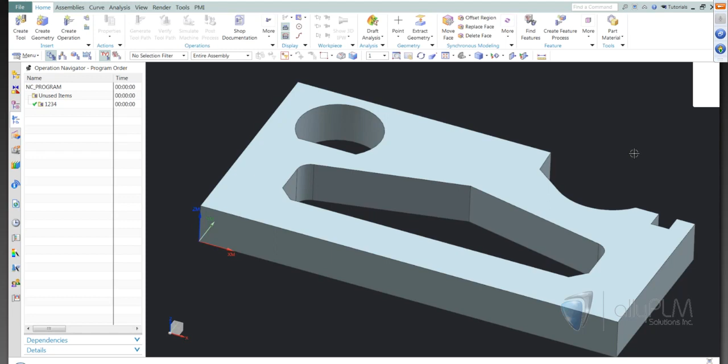Alright, to get started, the first thing we're going to look at is the no core operation. If you don't want to leave a slug in the middle, you can use the no core operation. It's going to basically use the wire to burn out the center of the pocket that you're trying to cut. Keep in mind this is only available in 2-axis. So if you're trying to do a 4-axis type part, this operation is not going to be available.

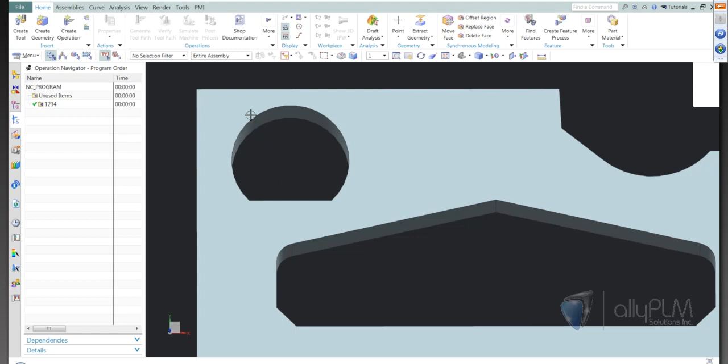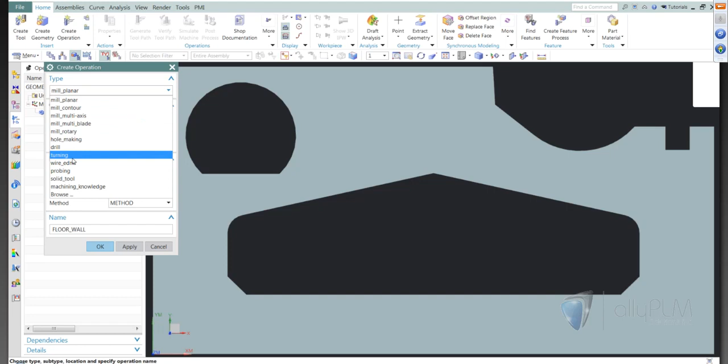So what we're going to do first is this cutout or pocket right here. And again, we're going to use the no core operation. I'm going to first define the workpiece, and then go ahead and create an operation. Under type, I'm just going to use the Wire EDM option.

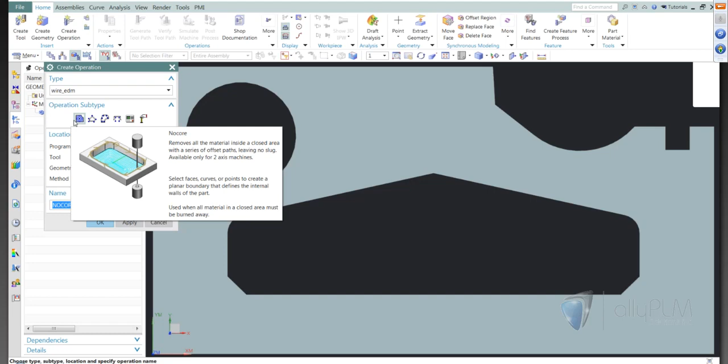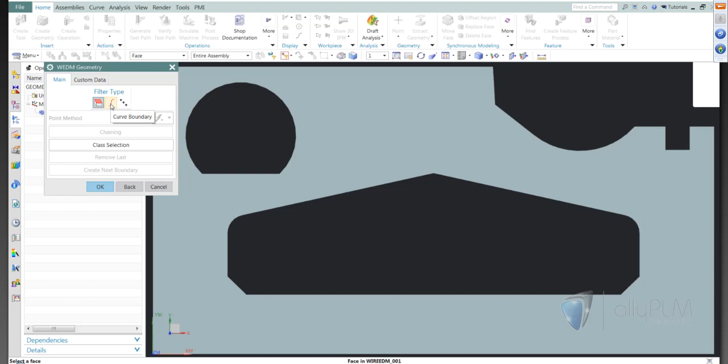So the first option that we're going to look at here is no core, and as you can see there, it removes all the material inside of a closed area with a series of offset paths, leaving no slug. Again, available 2-axis only. So the first thing I'm going to do is specify the Wire EDM geometry. In this case, I really only have 3 options for picking geometry: a face, a curve, or a point boundary. For this option, I'm going to use curve, and I'm just going to simply select the curves.

I'm going to go ahead and specify a tool. I'm going to use a 0.5 tool for the demonstration today, just so that you can see it a little bit on the screen. All right, we're going to accept most of the defaults here and then take a look at some of the details as we go. We're going to leave the default Follow Periphery, and we'll go into the cutting parameters.

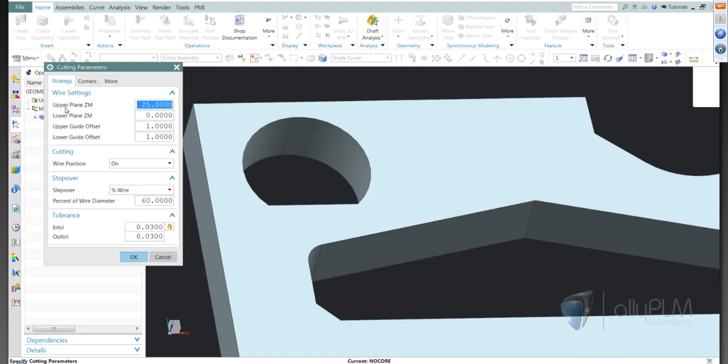Notice we have an upper and a lower plane. We need to set the upper and lower plane based on the thickness of the part. I'll go ahead and measure the thickness of this part. It is 30 millimeters, so my upper plane needs to be set at 30 millimeters. Our upper and lower guide offsets are set to 1 millimeter. We'll leave that, that's fine. And then we have a wire position on or tangent to. I'm going to go ahead and use tangent to.

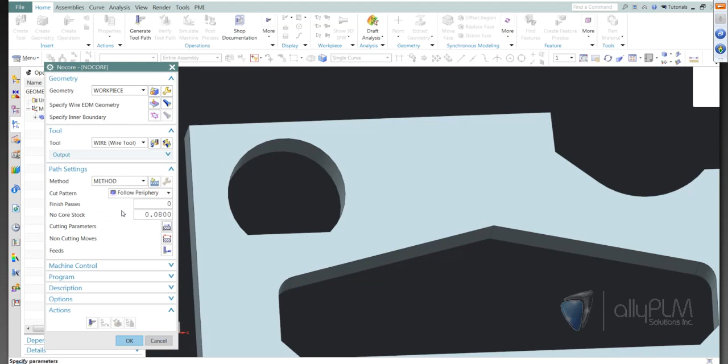Now our step over value is set to a percentage of the wire diameter, 60% of the wire diameter in this case. We'll go ahead and leave that and then accept the default tolerance settings. All right, so the first thing we need to look at is the Follow Periphery option. It starts in the middle and works its way out towards the outer perimeter of the feature.

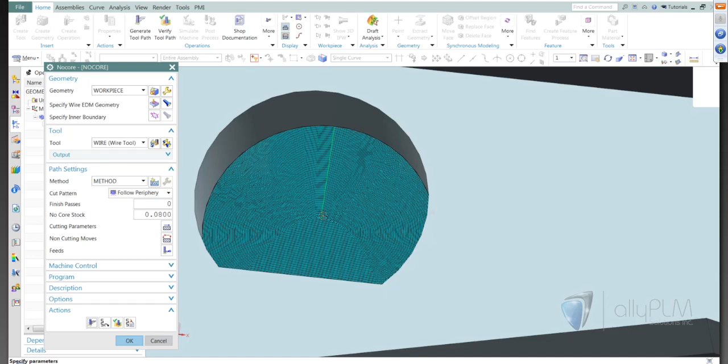Now, one thing that we didn't tell it is where the start location is. It automatically just picked a start location. What we can do is specify the start location. I can go back into the boundary, use control points, and specify our thread hole location. So I'm going to go ahead and specify that at the center and go ahead and generate. So now it is specified directly in the center of this arc.

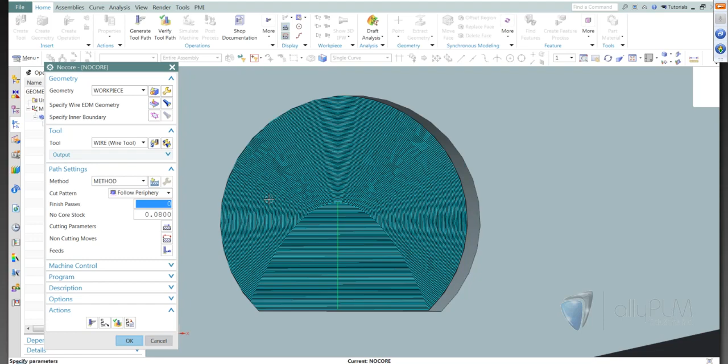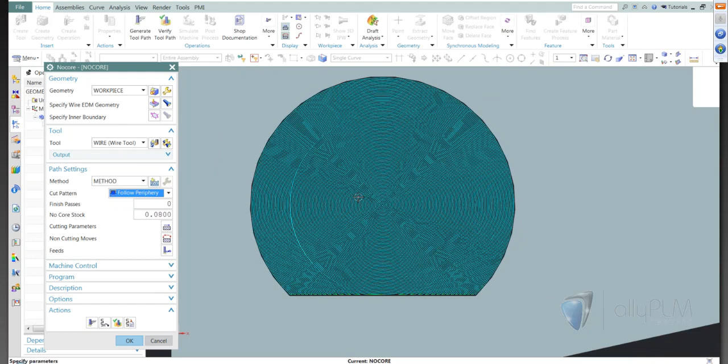The other thing that we should look at is the spiral option under cut pattern. I'm going to go ahead and change this and show you what it looks like. It starts at the center and then spirals outward. Now the only thing about this in this situation is we have these kind of jagged edges there, so that may not be desired. So you may want to use Follow Periphery in an example like this.

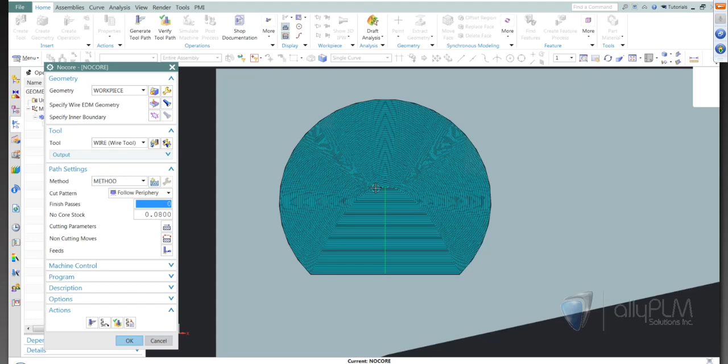The next thing we can do is specify an inner boundary. For example, maybe we already have a hole in here, like a starter hole. We don't want to waste time cutting out those little step overs with this wire, so we can define that inner boundary. To define it, I'm going to insert a curve, basically a circle curve.

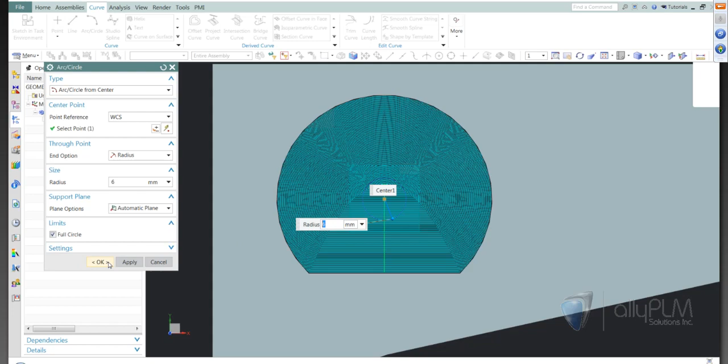I'll just draw a curve at the center point and give it a radius of about 6 millimeters. So now we see our curve.

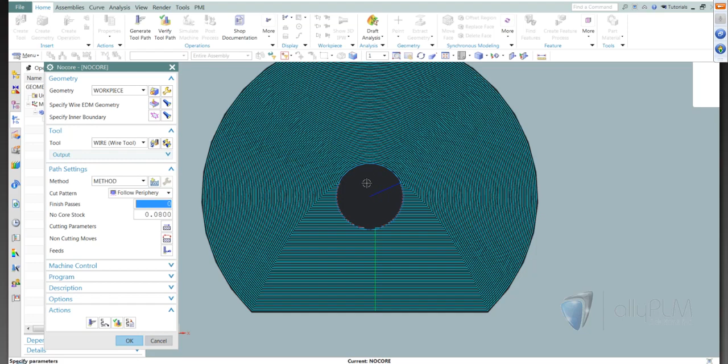Now I'll go back into the operation and again specify inner boundary, then simply select the circle and generate that. Now we're still starting from the center, but from the center of the hole, removing all that extra cutting to save you a little time.

The next option we're going to look at is the internal trim. This part is all 2-axis—you can see there's no taper or anything on it, so everything we do on this part is 2-axis. We're going to use the 2-axis internal trim for this pocket here.

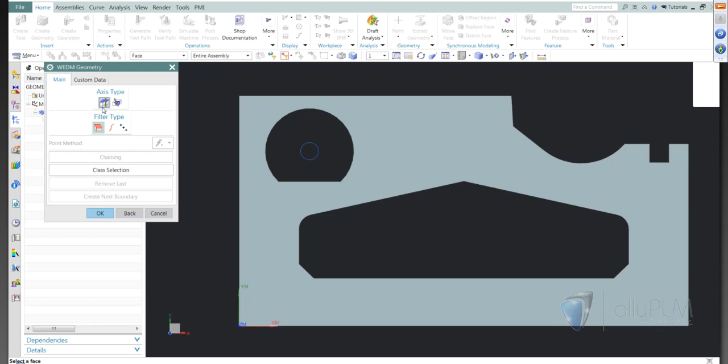Go ahead and create an operation and use internal trim. I can use the same tool from the previous operation. Now I'm going to specify wire geometry. Since we're doing 2-axis, the options for picking geometry are the same.

I'm going to use curve. Now I can pick each of these curves individually. It wouldn't take too long on this part, but imagine if you have a part with multiple curves to pick—it may take a while.

So I'd suggest using chaining. I'm going to turn on chaining, and if you haven't used it before, I'll describe how it works. For chaining, it depends on which side of the edge you pick on.

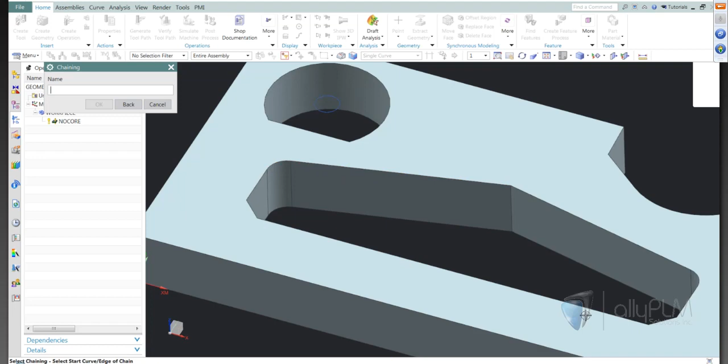For example, if I pick on the left side of the line, that's the way the chaining operation will go. If I pick on the right side, it will go around the other way. So I'll pick on the left side, and NX will follow all the way around to wherever I pick next. I'll simply pick here, and it chains all the way around for me. So again, it matters which side of the line you pick on. That looks good.

Now for now, I'm going to set the rough passes to 0. We're not going to take any rough passes, just one finish pass on this part. We'll look at backburn distance here in just a minute.

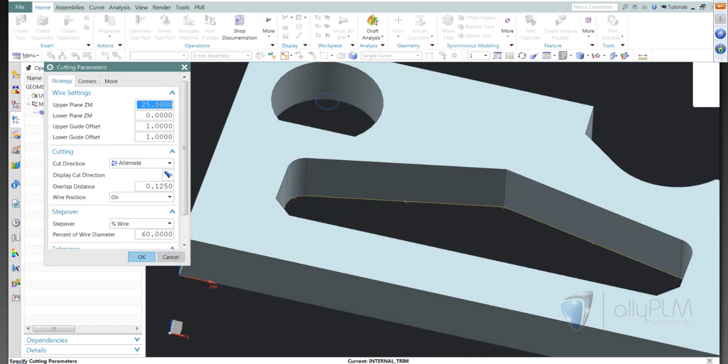In cutting parameters, again we need to set the upper plane, which was 30. Upper and lower guide is a millimeter, that's fine. We're going to do alternate directions, and since we're just doing one finish pass, this won't matter—we could do either clockwise or counterclockwise.

You can select these, especially when doing roughing passes, to determine which way you want your cut direction. In this case, it doesn't really matter.

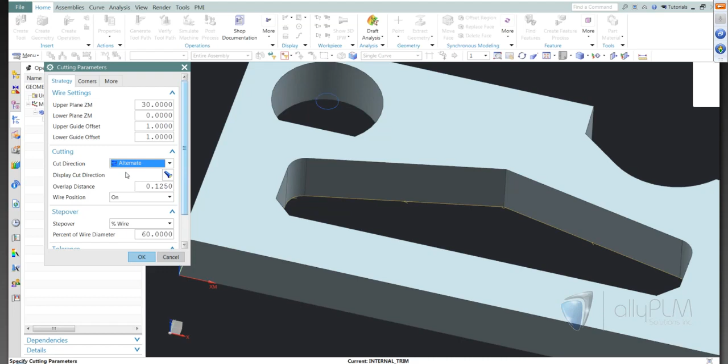Now, overlap distance. When this wire cuts all the way around this outer shape, if it starts and stops in the exact same location, you have a chance of leaving a little edge or piece of material sticking out. So we can set an overlap distance. I'll set that at about 3 millimeters, and we'll take a look at it after this generates. We're going to do wire position tangent to, and step over shouldn't matter in this case either.

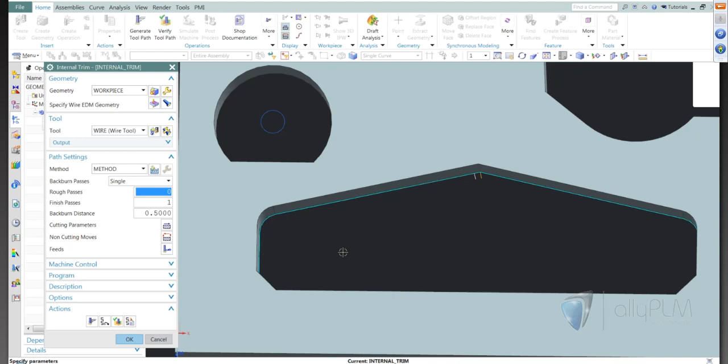We'll go ahead and generate this operation. Notice NX automatically picks the start location, or the lead-in and lead-out points, and it happens to pick right here. That may be fine, but if you want to set it at a certain location, you can still do that as well.

Notice the gap between here—one is the lead-in, one is the lead-out, and the gap between is the overlap distance. We'll take a look at this in verification. Notice it's leading in here, and then it works its way around the part.

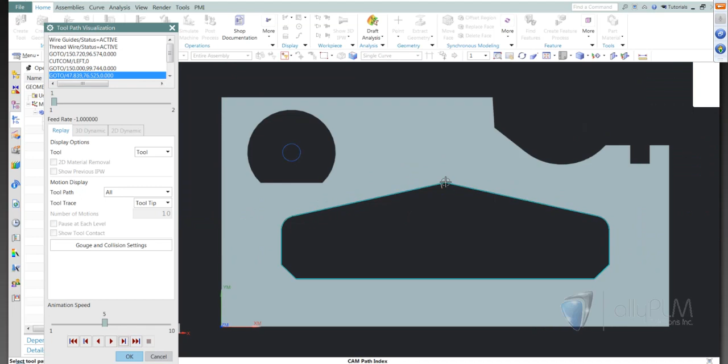Gets back to here, and again overlaps so that you don't have that extra piece of material left when you're done, and then does its lead out.

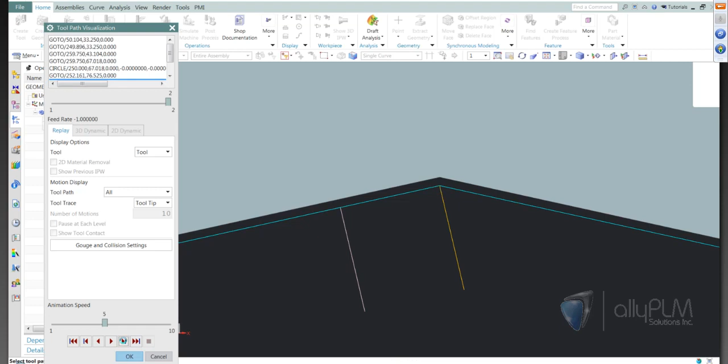So now we're going to look at doing a lead in over in this corner. So I'll go back into internal trim.

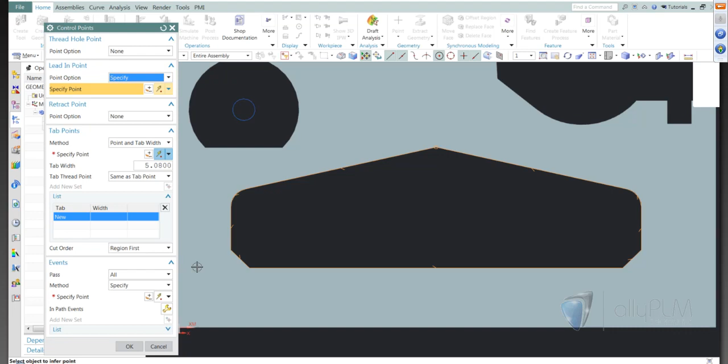To do that, I need to go back into my wire geometry and go to control points. You have a lot of options here: a thread hole point, lead in point, retract point, tab points. So what we'll do is I'll go ahead and add in just a lead in point for now. I want my lead in point to be centered on this edge. Go ahead and accept that and generate. Now notice that my lead in is directly centered on this edge.

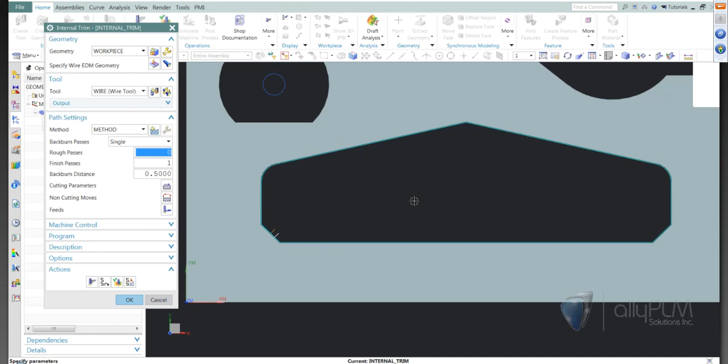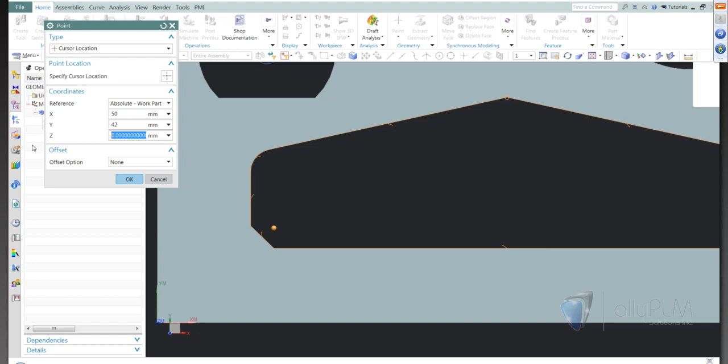Now to specify a start hole location or a thread hole location, we use the same options here in control points, and then we'll just pick a point. So I'm going to use thread hole point, point option. I'm going to bring up the point dialog and click somewhere close in here. In a real scenario, you would have a hole there and know the position of that. So for this example, I'm just going to use 50 in X and 42 in Y, and we're going to assume that block has a hole there for our wire thread location.

All right, we'll generate that. So notice it comes from here over to the lead in and then starts the wire cut operation.

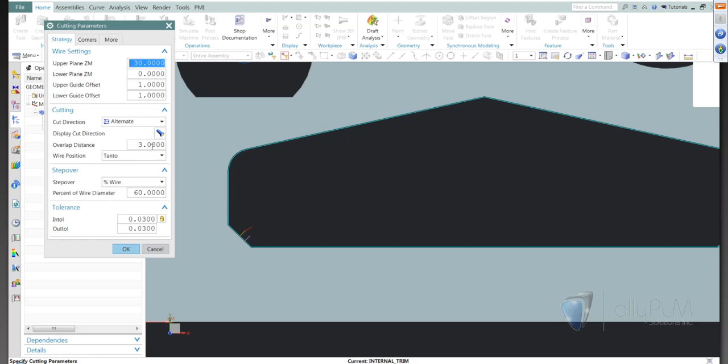I'm going to go back into cutting parameters and change this overlap distance to 0, so that we can see what this backburn distance does.

For example, maybe I want multiple roughing passes on this part, and I want to leave a little tab here basically to hold this slug in place. So if I do multiple rough operations, I'm going to put 3 in here. My backburn distance is the length of tab that it's going to leave.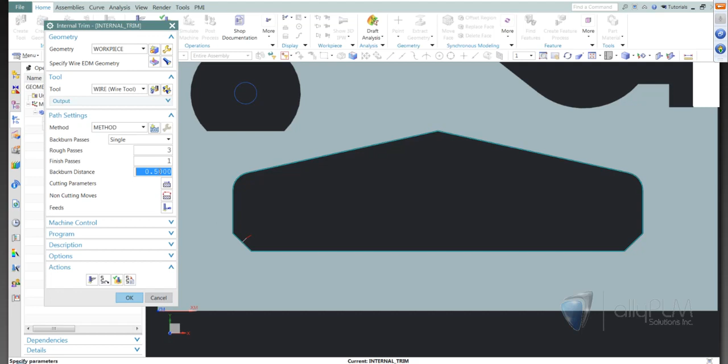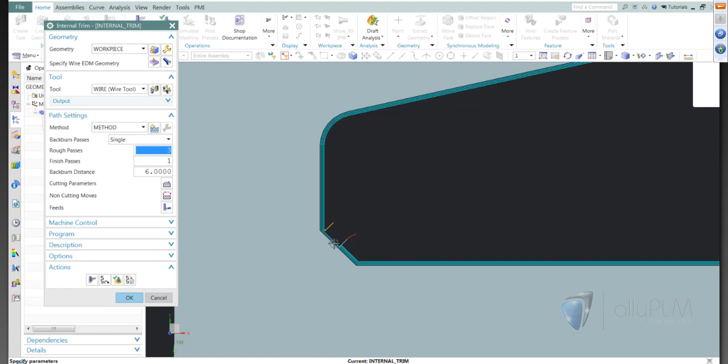I'm going to use half a millimeter so we can see it, and change that to a bigger amount, let's say 6 millimeters. Now you can see that it's leaving a tab. So it does its rough cuts, leaving this tab connected, and then when it goes to do the finish cuts, it cuts this tab off.

We can also add in multiple tab locations. For example, we can have a tab here, and then maybe a tab over here on the right side. We do that by going into control points again and adding in a tab point.

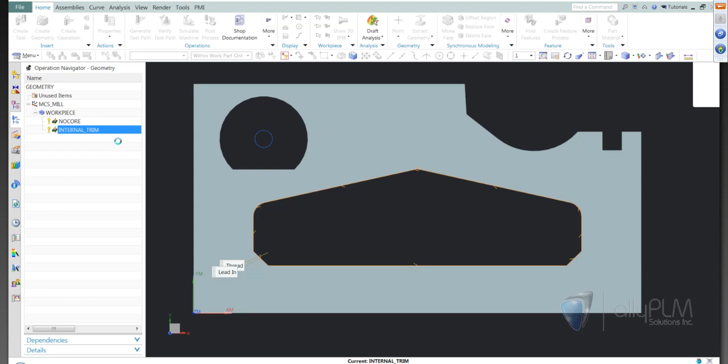The method we're going to use is a point and a tab width. So I'm going to specify a point, and just select the center of this edge. And then for the tab width, just to make it match the other side, I'll do 6 millimeters.

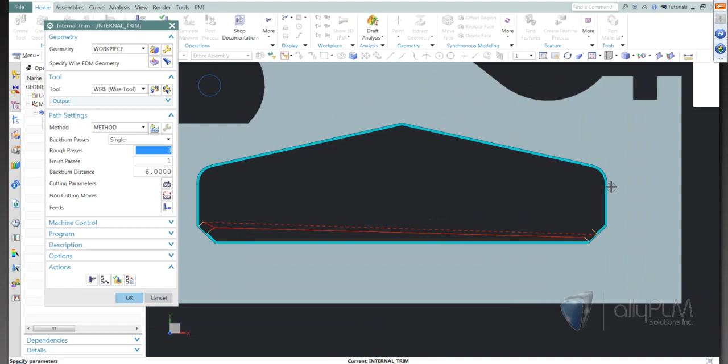And we'll generate that. Now notice we have basically a gap or a tab here on the left side, and then also a tab here on the right side. So again, that's just a way to hold the part in place until the finish cut.

All right, so now let's take a look at external trim. We're going to first cut all the way around the outside of this part. Again, this is a 2-axis part, so we use the 2-axis external trim operation. So we use external trim with the same tool.

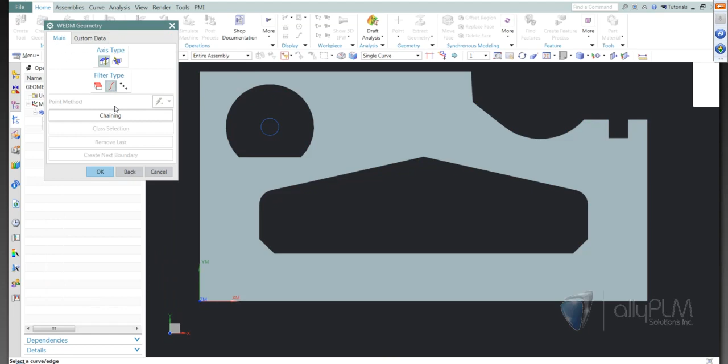And we'll go ahead and specify our geometry. Nothing really different here on specifying geometry. I'm going to use chain again, and I'm going to pick the left side of that edge, and NX will chain all the way around there for me.

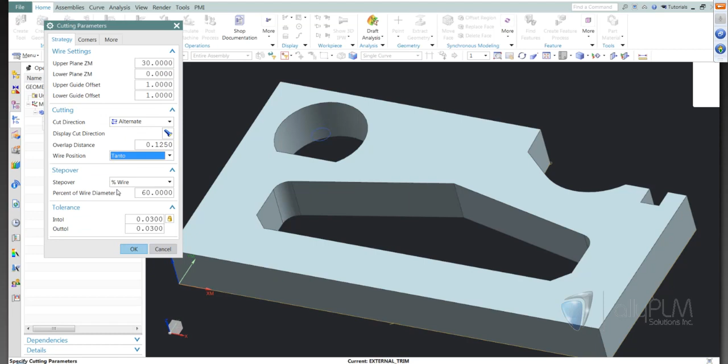And like we did before, I'm going to specify 0 rough passes and 1 finish pass. We'll need to input this upper plane again, and we'll go ahead and generate. So again, NX automatically picks the lead in and lead out location.

So if we want that to be in a different location, we can do the same thing. This works the same way as internal trim, by going to control points and then specifying a lead in point. So maybe we want the lead in over here on this edge, and we'll go ahead and generate that.

Now this also leaves a tab. The default was 1 millimeter. So if we needed to leave an extra amount there, we could type in whatever distance, and it will change that value. If we don't want anything, we can do just 0 here.

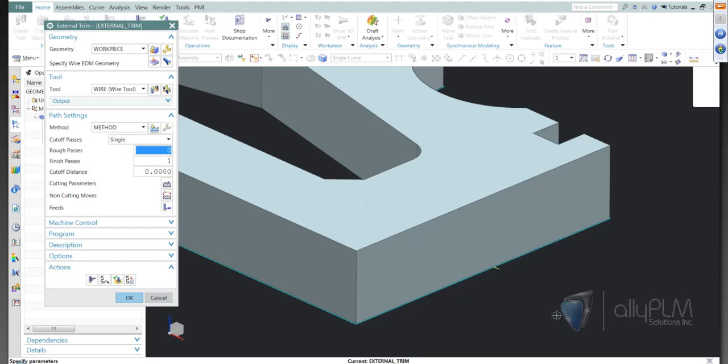There are also a couple other options in non-cutting moves for our engage type. We can select lead in. Notice it's set to direct. We can specify an angular lead in. For example, maybe we want this to come in at a 45-degree angle.

So now we're leading in and leading out on a 45-degree angle. The lead out is set to the same as lead in.

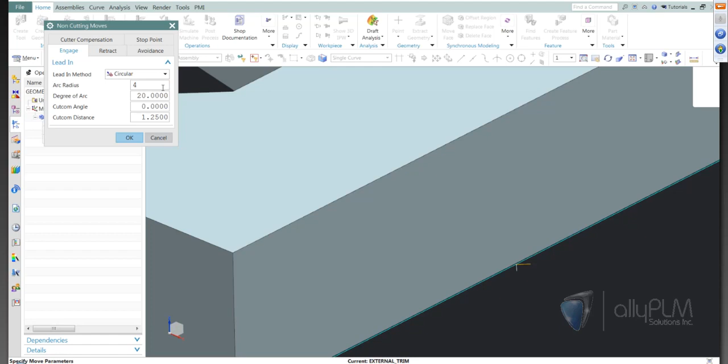And then we also have an option for a circular lead in as well. So we'll do an arc radius of, let's say, 4 millimeters. So now we have an arc coming in.

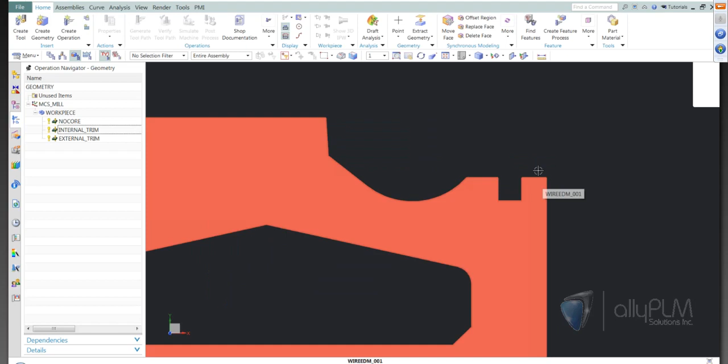All right, now we'll take a look at the open profile option. For example, maybe the outside of this block is already cut, and all we need to do is this cutout shape here. We'll use the open profile for that.

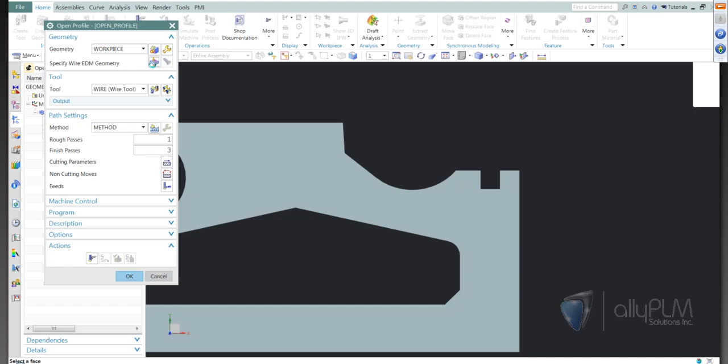So I'll create an operation, open profile, and we'll go ahead and select our geometry. This is 2-axis as well. And I'll go ahead and use chaining again. So I'll pick the right side of this edge, and I want it to finish up over here. So the start and then the finish.

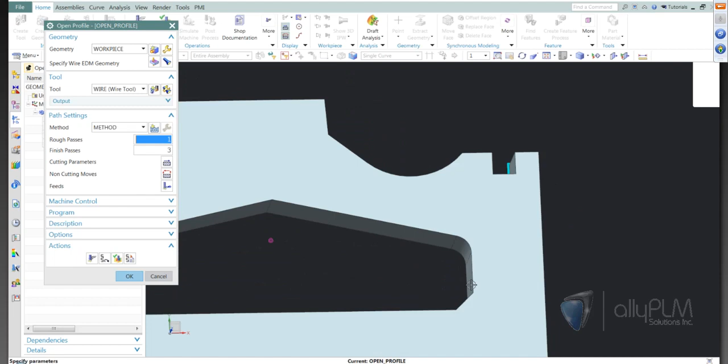And I'll go ahead and leave rough passes and finish passes at the default. And there we see the operation. So we see it is doing 1 rough pass and then 3 finish passes.

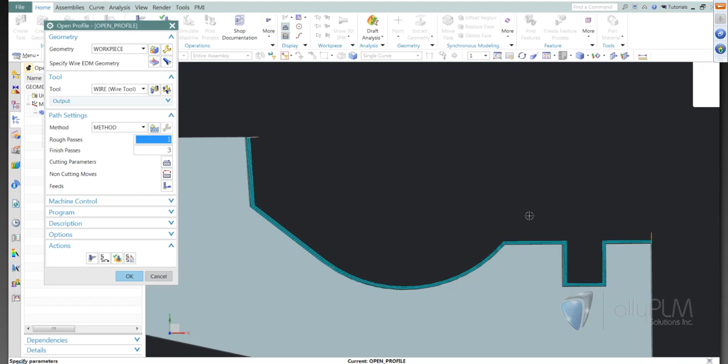So the only difference between open profile and external trim is the fact that this profile is an open profile instead of a closed one. It's not completely closed. And then we have the same options available that we did in external and internal trim as far as lead ins, lead outs, things like that.

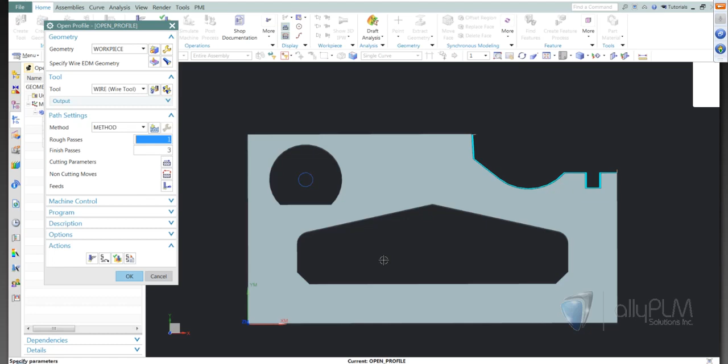Okay, so now we'll go ahead and close this part out, and we'll take a look at another part that is going to require 4-axis. As you can see in this part here, all of the walls on this internal profile have taper. So this is going to require 4-axis wire EDM.

So I'll go ahead and specify the part, and go ahead and get started creating the operation. This is going to be an internal trim operation. And I'm going to need to specify the wire geometry.

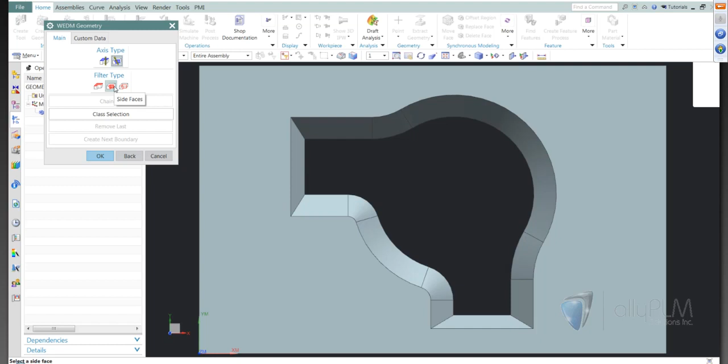Notice I have a toggle back and forth between 2-axis and 4-axis. I'm going to need to select 4-axis. A couple options that we have here: we have a top face option and then a wireframe option for geometry selection. I'm going to go ahead and use side faces.

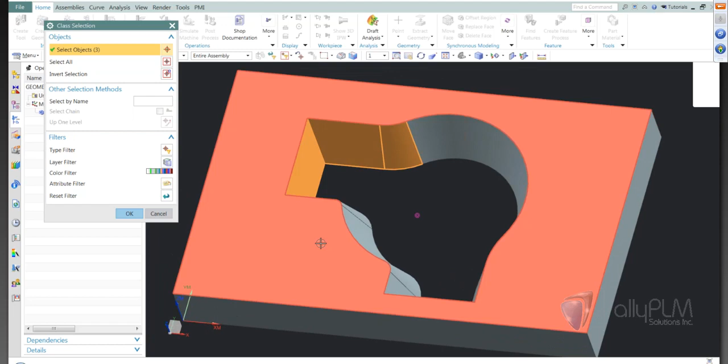So now all I have to do is select these faces. I can select these faces individually. However, if you have a lot of faces to select, you may not want to select those individually. So if you want to use a window selection, you can go into class selection, and then you have some other options, filter options and things like that as well. So now I'm able to use the window selection.

And now I'm going to go ahead and specify the tool. Again, I'm just going to use a 0.5 millimeter. And we'll set our roughing to 0 and just do one finish pass for now.

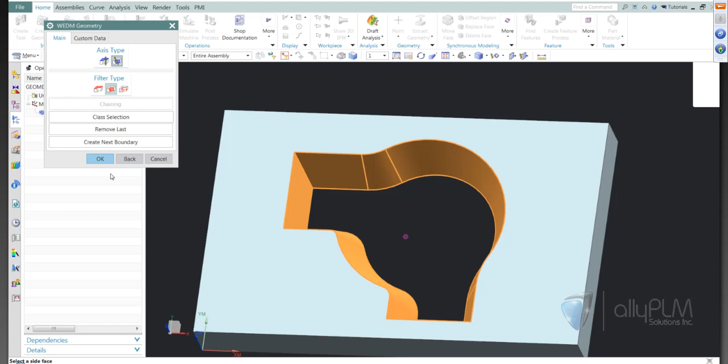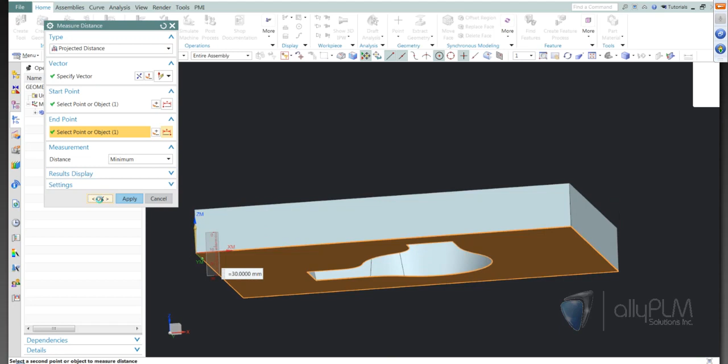And we need to specify the height again. I'll check this part as well. I think it's 30 millimeters as well. Yes, so we'll input 30. All right, all that looks good.

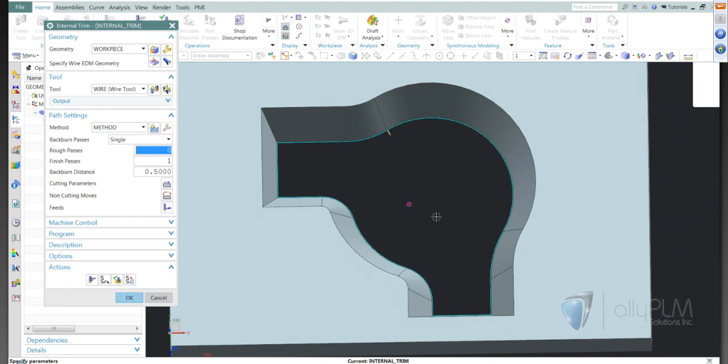Okay, so let's take a look at 4-axis internal trim. We'll go ahead and generate this. Again, it automatically picks a start location. So we'll go into verify, take a look. So notice that the tool is along the angle of the pocket.

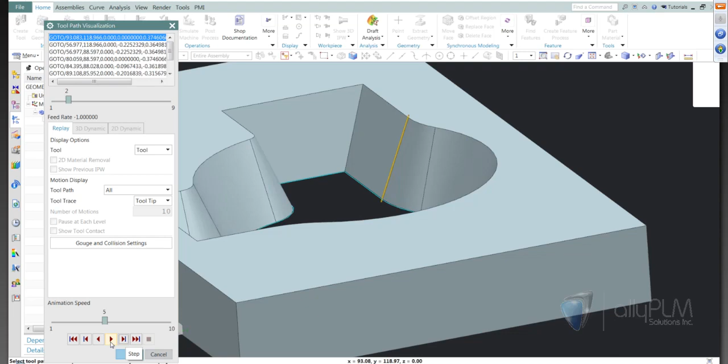Okay, so now what we'll do is the same way that we did on 2-axis, we can do the same thing in 4-axis. We'll go ahead and specify some control points. Let's do a threaded hole. Maybe our threaded hole is down here at this location. We'll go ahead and do 150 and 30.

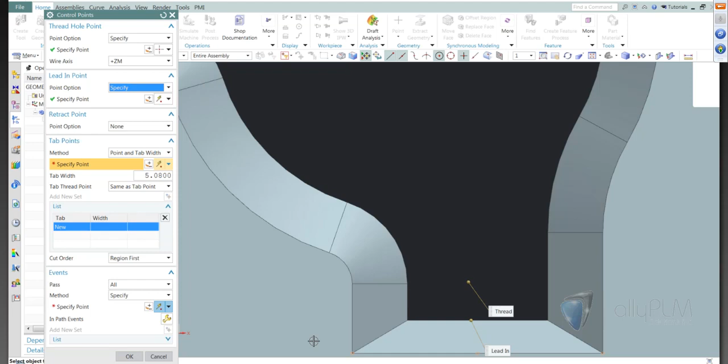And then we'll do our lead-in point centered on that edge. And we'll go ahead and turn on our roughing passes. Let's do 3 roughing passes. And we'll generate that. So again, now you see the roughing passes and then that final finish pass.

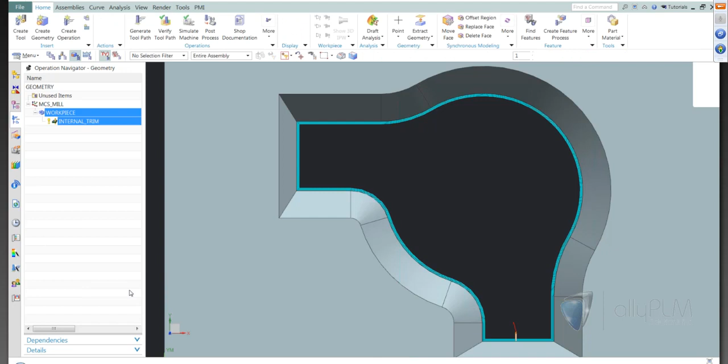Now we have our thread hole location and then our lead-in location. Again, this works basically the same way as the 2-axis operations. All right, so let's take a look at a part that's going to require 4-axis external operation.

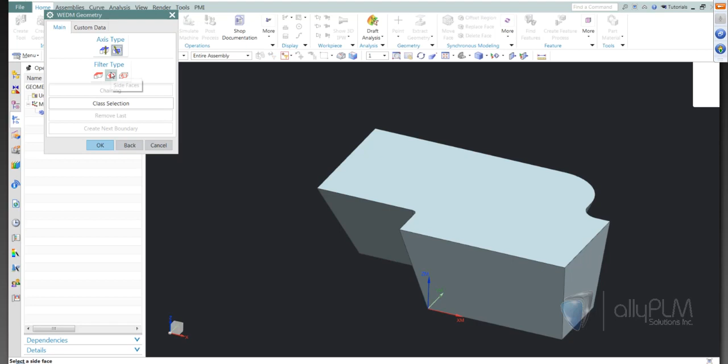Now for specifying geometry on this, again I'm going to use 4-axis and then use side faces. I'm going to go into class selection. Now I can pick these individually. I could probably try to do a window selection as well, but notice I have multiple faces around the outside of here, so it may take you a while to pick those.

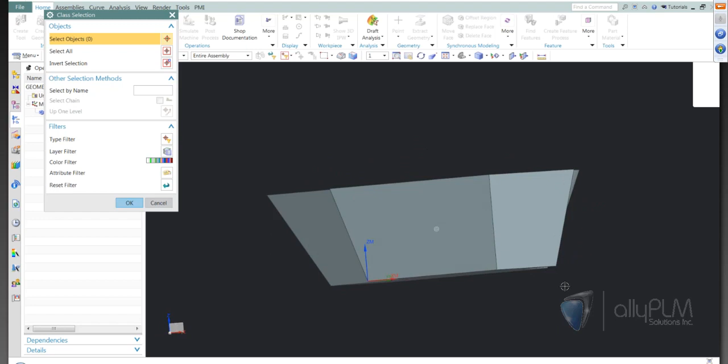A little shortcut would be to pick just the top and the bottom, and then actually just use invert selection. So that will invert the selection. So instead of picking the top and the bottom, it will select everything else for you. So a little shortcut there that may save you a little bit of time. So now we've picked our faces around the outside of the part. Specify the tool.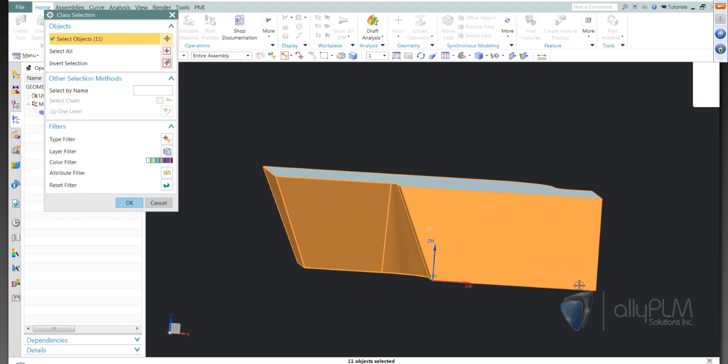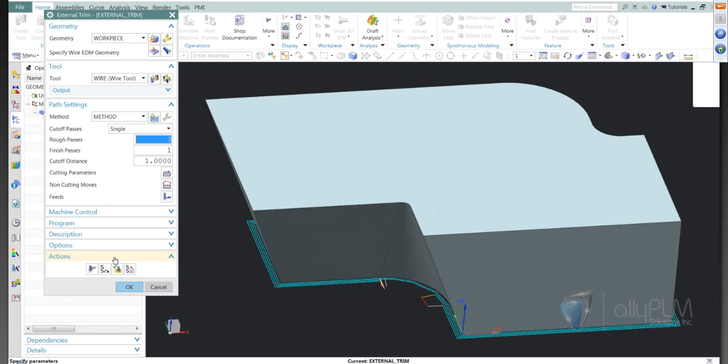And we'll go ahead and leave roughing passes set to the default. In cutting parameters, again, I need to specify the height of the part. So this part is 20 millimeters tall. We're going to go ahead and leave the defaults here, except for change this to tangent to, and go ahead and generate this. Now notice we have a cutoff distance here. And we'll go ahead and verify this. Okay, so that looks good.

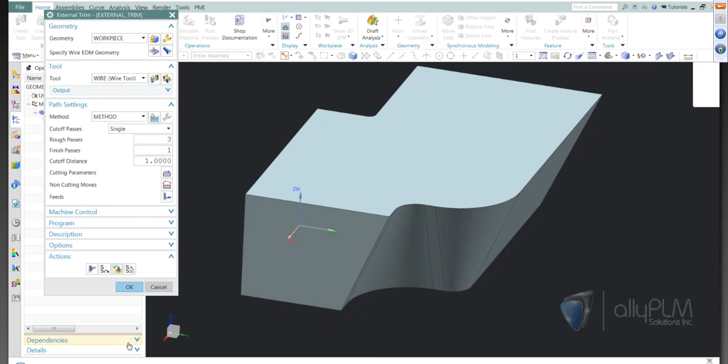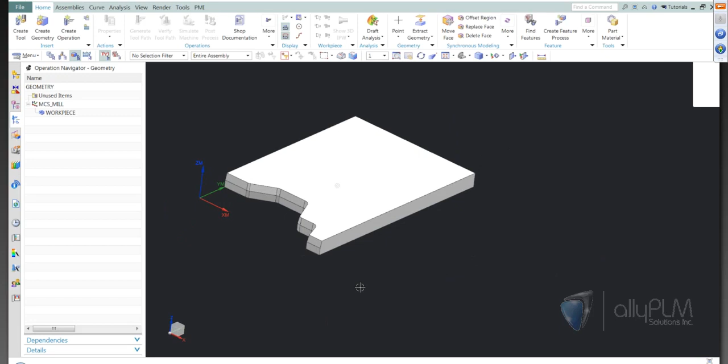So as you can see, the external trim with 4 axes basically works the same way as internal. You have the same type of settings that we looked at for internal trim. Now let's take a look at one other part that I have here. Okay, what you'll notice on this part is it has basically a straight face here. This is vertical, and then we have tapered faces here. So in order to cut this, we can actually just use 2 different types of operations. We can cut the straight face and then the angled face as well.

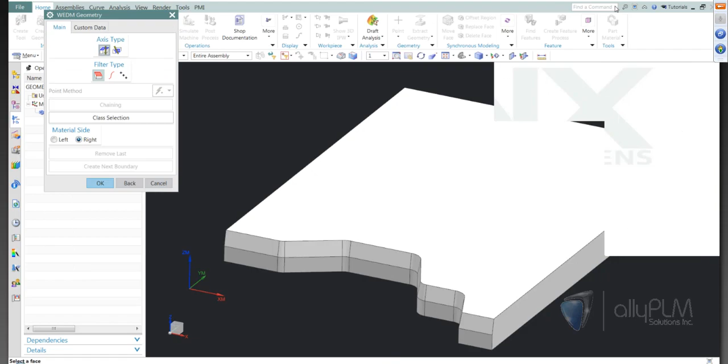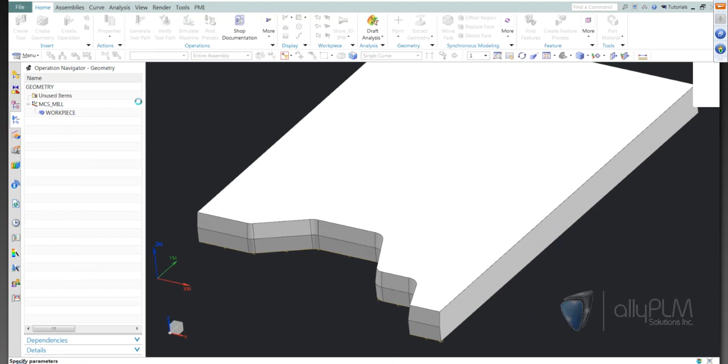Go ahead and define my workpiece. Go ahead and create an operation. This is going to be an open profile. And I'll go ahead and use the 2-axis option for now. I'm going to use the curve option and then chaining. And I'll go from the right side over to the left. And I'll go ahead and use the same diameter wire that I've been using.

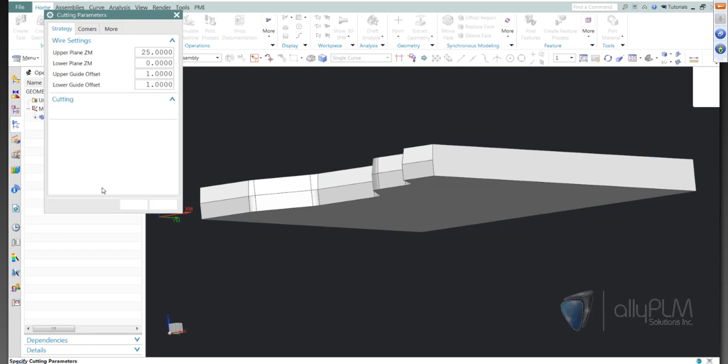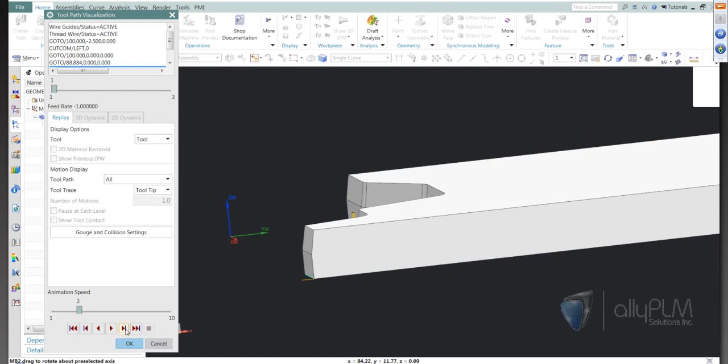All right, and we also need to set that upper plane. So I'll go ahead and measure this part in the Z direction from top to bottom, and that is 10.16. And I'm not going to do any rough passes. I'm just going to do one finish pass here. And in verification, you can see that the wire stays straight or vertical and just cuts that straight edge or vertical edge.

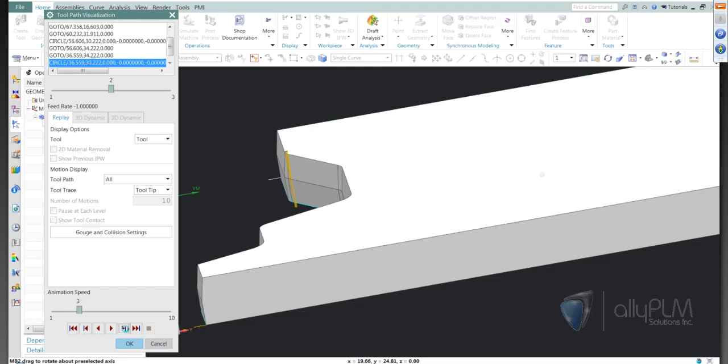So then the next thing that we can do is we can actually use 4-axis and then go along this tapered edge. So I'm going to do open profile again, use the same tool. Now when I go into my geometry selection, I'm going to use 4-axis, and then I'm going to go ahead and pick the faces that we need to cut. That looks good. Now in cutting parameters, I need to set that value again, 10.16. I'm going to use tangent 2 on my wire position. And just do one finish pass.

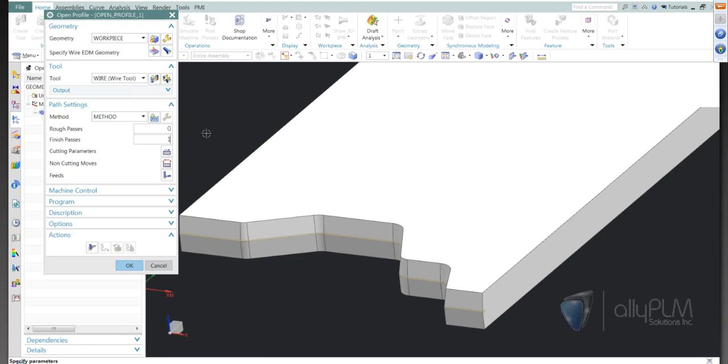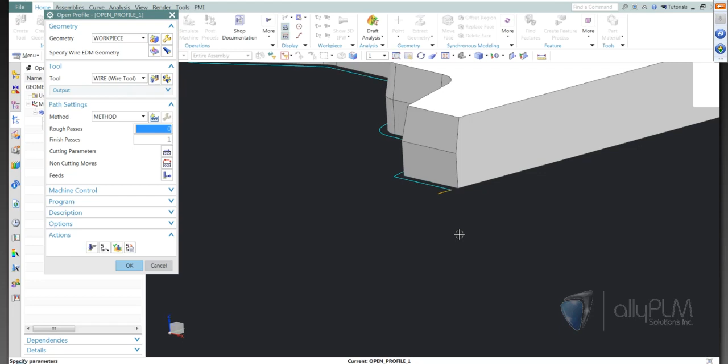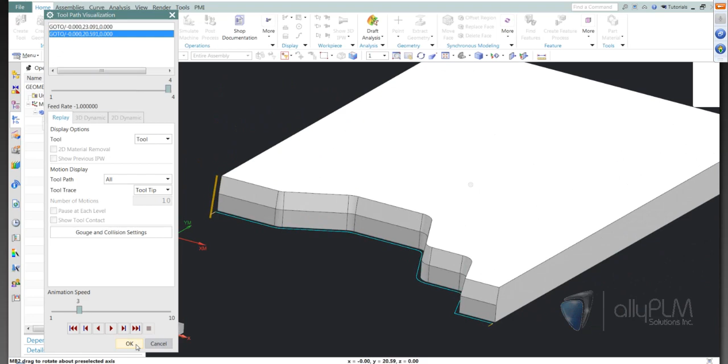So notice what it does is it projects this angle face down to the Z0 level, down to that lower guide. So we can see that in verification here. So notice the wire is along this angle. So even if you don't have a full, complete tapered surface, you could still achieve the cutting conditions that you need to cut a 4-axis tapered shape like this. Okay.

Well, that's all the time that we have for this session of Lunch Bites. I hope today's session was informative for those of you that haven't done Wire EDM programming before, and I hope for those of you that have done Wire EDM programming, maybe you were able to pick up on some shortcuts or tips along the way.